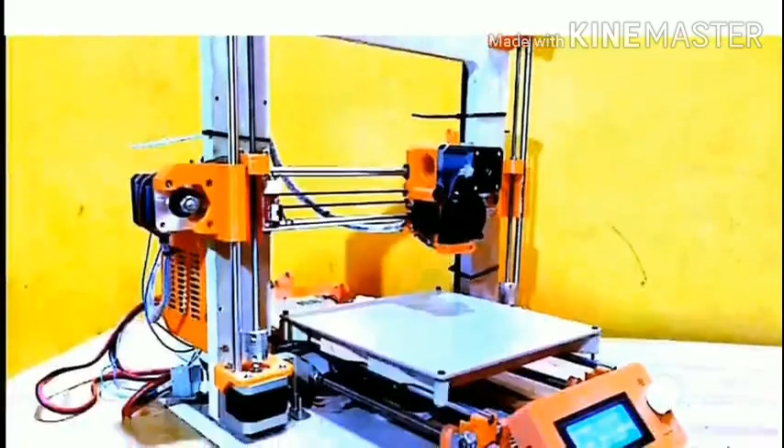We are going to use FDM technique in our 3D printer. FDM stands for Fused Deposition Modeling. Fused deposition modeling is an additive manufacturing process that belongs to the material extrusion family. In FDM, an object is built by selectively depositing melted material in a predetermined path layer by layer. The materials used are thermoplastic polymers.

Fused deposition modeling is one of the most widely used technologies in rapid prototyping. On the principle of layered manufacturing, the melted polymer filament is extruded and formed. Now, FDM technique.

FDM 3D printing is a technology that works both horizontally and vertically, where an extrusion nozzle moves over a build platform. The process involves the use of thermoplastic material that reaches melting point and is then forced out to create a 3D object layer by layer.

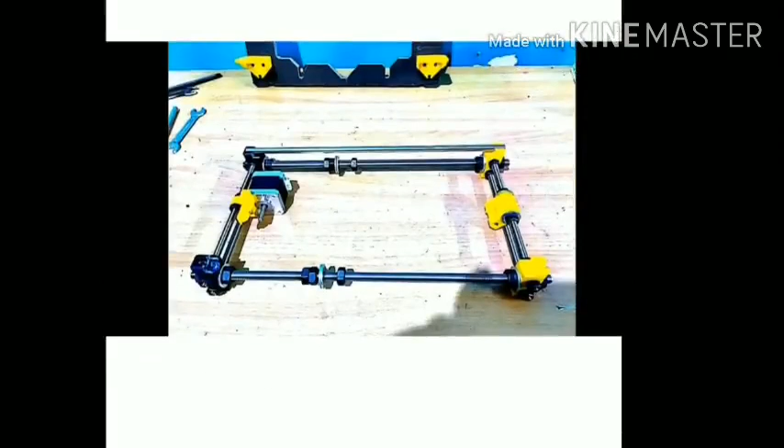This is the assembly part of our 3D printer. This is the base for the Y-axis assembly, which we made through a CNC machine. Here this is the Y-axis assembly. The motor is mounted on the rods, which in turn move the bed as per the requirements. The length of the rod is 370 mm. Here the Y-axis assembly is mounted on the base frame.

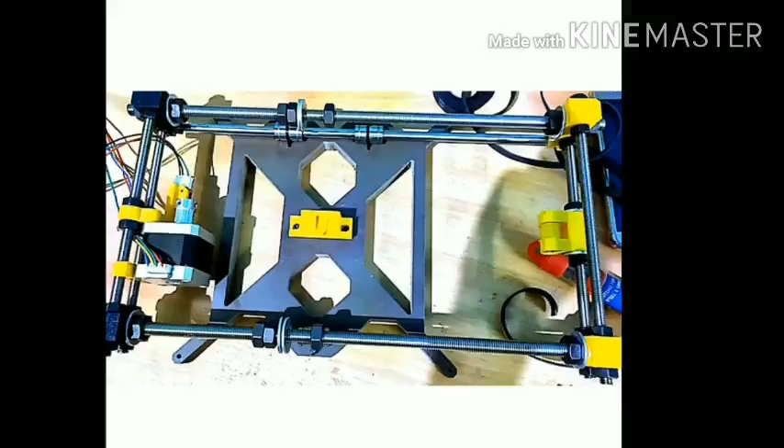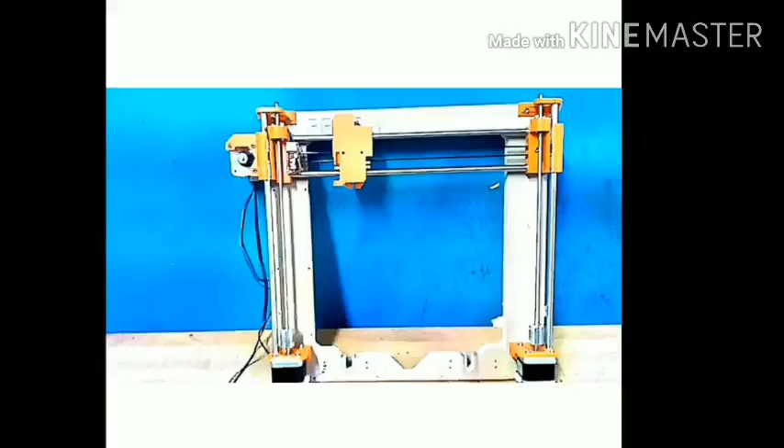The X-axis assembly, on which the extruder and the nozzle are mounted, and their movement is controlled using a stepper motor. The Z-axis assembly, in which there are two stepper motors mounted on each side, which help to move the extruder assembly up and down in the Z-axis direction.

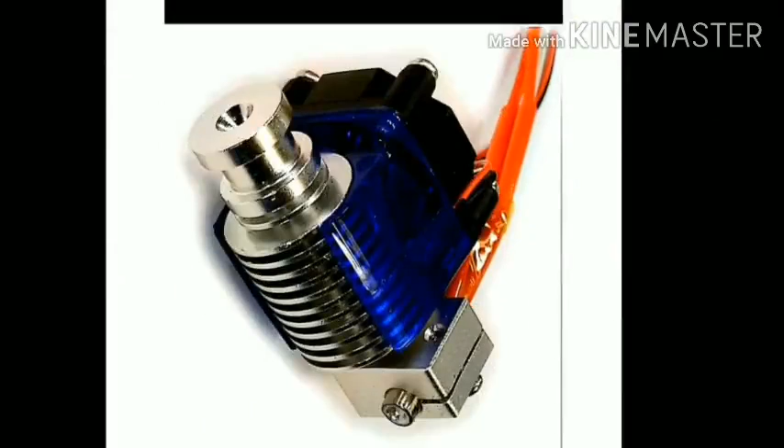This is the extruder unit. Extrusion is a process used to create objects of a fixed cross-sectional profile. A material is pushed through a die of a desired cross-section. We are using the method of direct extrusion, in which the extruder is placed directly above the nozzle. Now let's look at the electronic components that we have used.

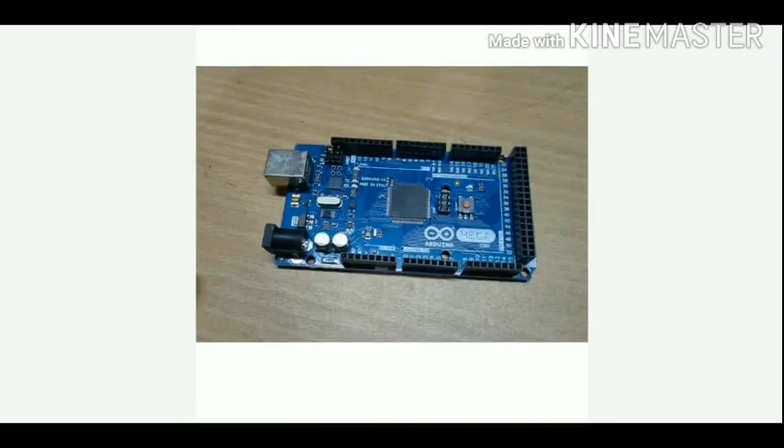This is the Arduino Mega 2560 board. It is the microcontroller board that we will be using. This is the RAMPS 1.4 daughter board that is mounted on our Arduino Mega. RAMPS is RepRap Arduino Mega Pololu Shield. It's the brain of 3D printers. It serves as an interface between the Arduino Mega and the devices on the 3D printer.

On this we are also going to mount the stepper motor drivers and the end stops. On this you can put up to 6 end stops, but we are only going to use 3. It also has heat bed controls and extruder control pins. RAMPS organizes and compiles the information coming from the Mega so it is properly directed to the correct channels.

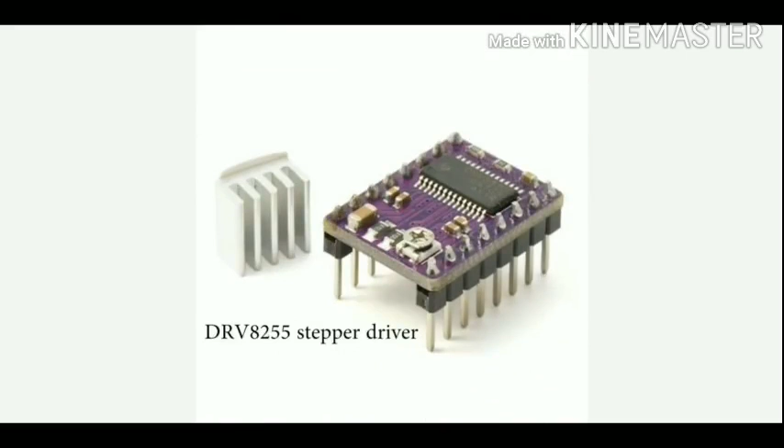Next we have the 12 volt DC stepper motor that we have used. We are using these stepper motors for controlling the X-axis, Y-axis and Z-axis movements. This is the DRV8825 stepper motor driver. The function of this is that it controls how the stepper motor operates. It works by sending the current through various phases and pulses to the stepper motor.

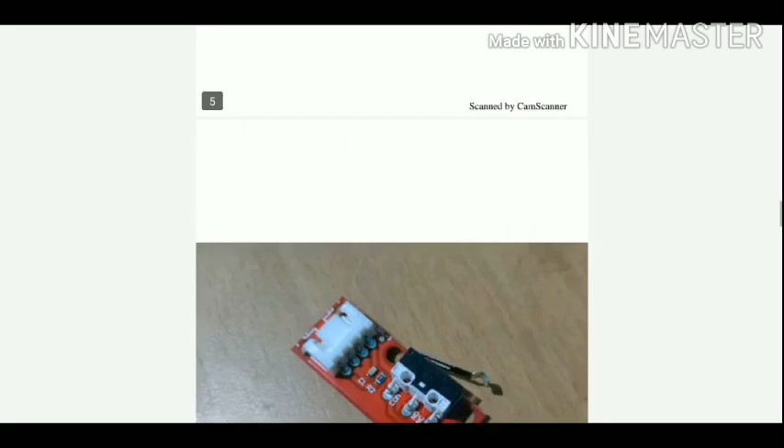Next we have this end stop. The end stop is for the reference of the axis. So we are going to use 3 end stops. We are going to use this to know the position of the nozzle. When the printer is started, the software doesn't know the starting position of the nozzle. So with the end stops, we are going to know the starting position of the nozzle. This process is also called homing.

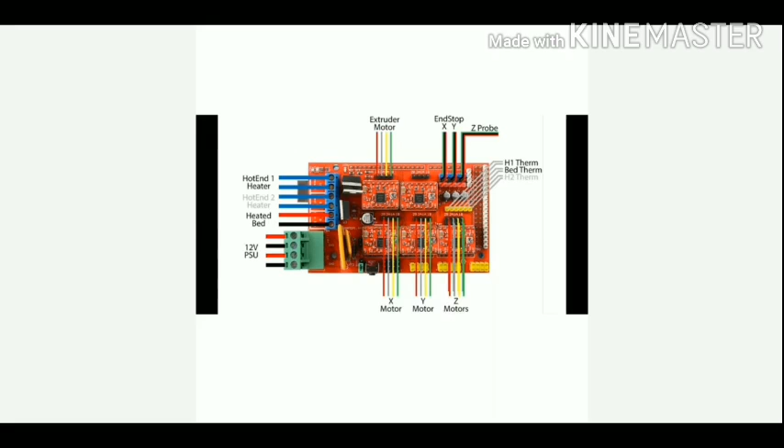This is how the circuits and pins and everything are connected to the RAMPS board. You can see where the extruder motor goes, where the end stops for X, Y and Z axis go. You can also see the X, Y and Z motors where they are fitted. This is the power supply that we have used. It is a 30 amps power supply unit.

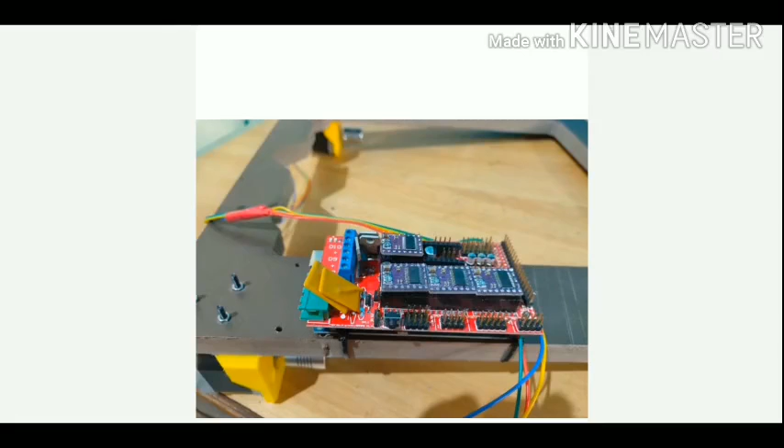Here you can see that we have mounted the Arduino board on the frame of the Y-axis, and on that we have put the RAMPS board on the Arduino Mega board. And here you can see that we have mounted the power supply on the Z-axis frame.

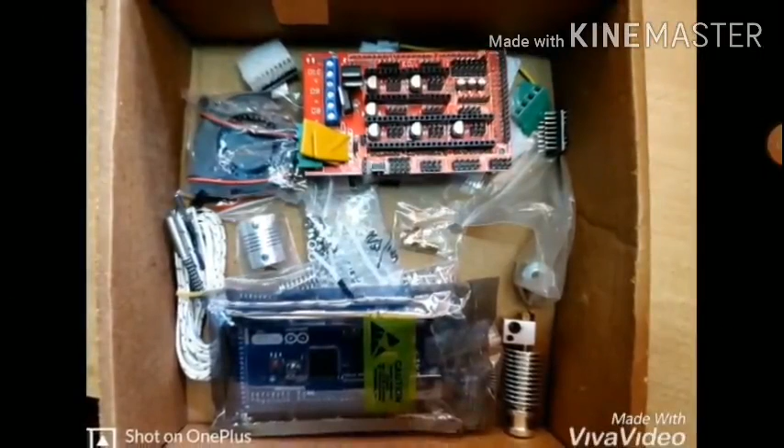So to carry out the construction of the 3D printer, we have purchased some parts. These are electronic parts which include thermistors, sensors and some electronic boards. Then we have the stepper motors, the bearings, the wires and the steel rods, Arduino board and the power supply unit.

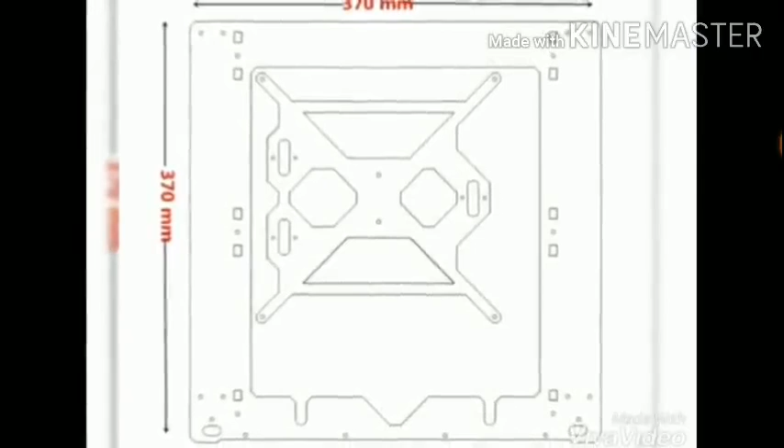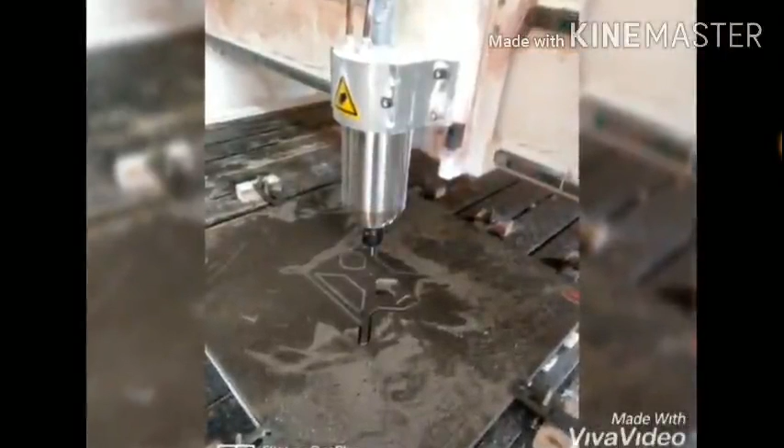So the most important part of the 3D printer is the inner frame and the outer frame. The length is 370 mm and the breadth is 370 mm, and it has a thickness of about 12 mm. The machining is carried out using a CNC machine, and the material used for machining is wood.

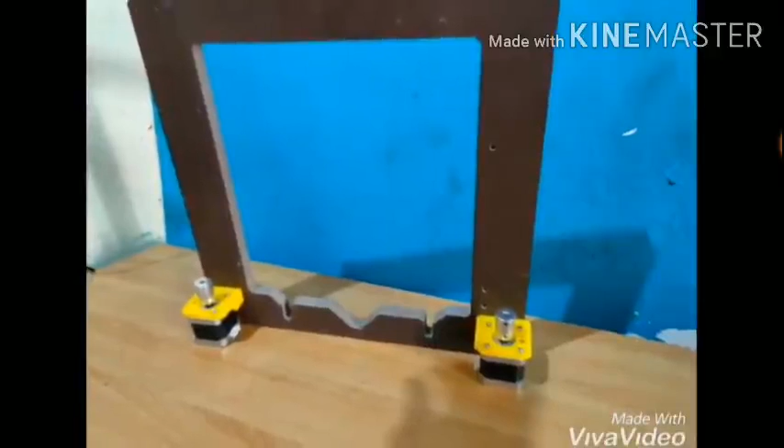So the base acts as a frame, or it acts as a hot bed assembly, and the outer frame or the vertical frame will be held vertical, so it will help in the upward and downward movement of the extruder assembly. Then we have also designed some other 3D printed parts using another 3D printer.

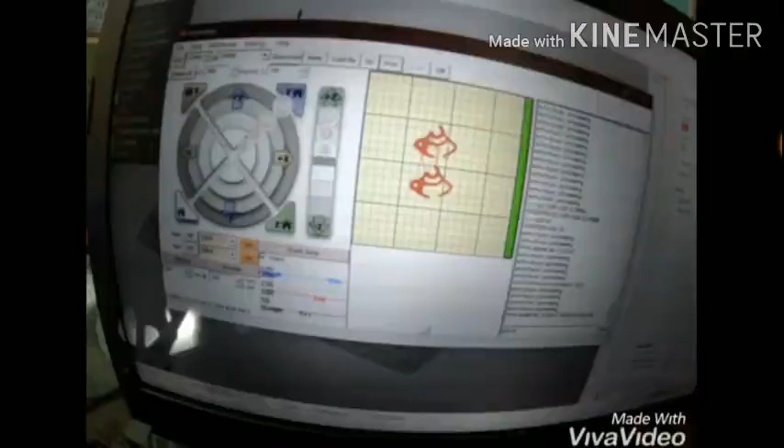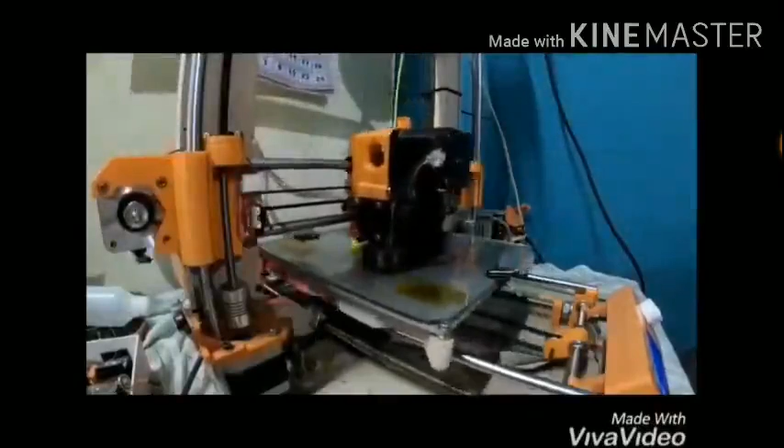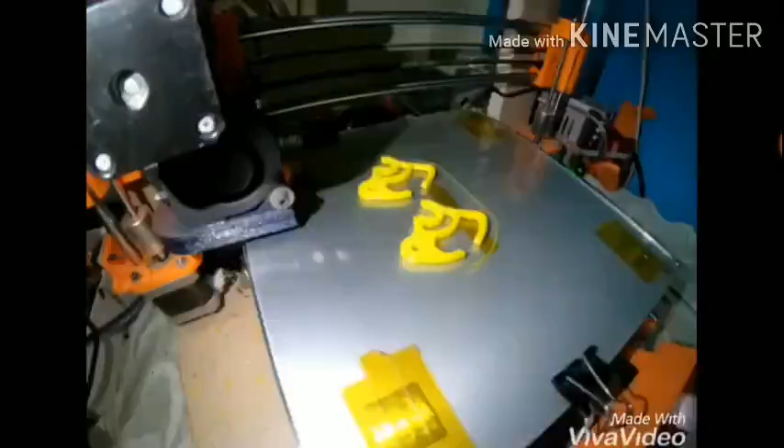So the three basic steps that we need are designing, then slicing and then G-coding. We have first designed the part, then we have sliced it, and then we have obtained the G-code. This G-code will be recognized by the 3D printer, and it will get the necessary output. These steps are further explained in detail, like how the process has been carried out. So this was the part which has been designed.

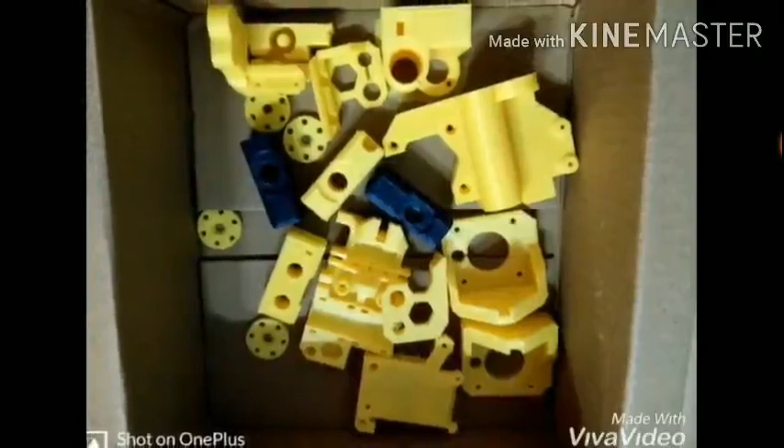So these are some of the parts which we had designed, which will help in the movement of the stepper motors and also help in the building of the X, Y and Z assembly.

Now coming towards the software that we are going to use in this process of 3D modeling using FDM techniques, we are going to use Fusion 360 software, that is used for designing. Then next we have slicer software, which will slice the object that we have designed and want to print, and it will generate a G-code.

And another software called Pronterface, wherein we are going to load the file and give the signals of the G-code to the printer. So now I have directly taken an STL format file which has been done through Fusion 360, and the view of it looks something like this.

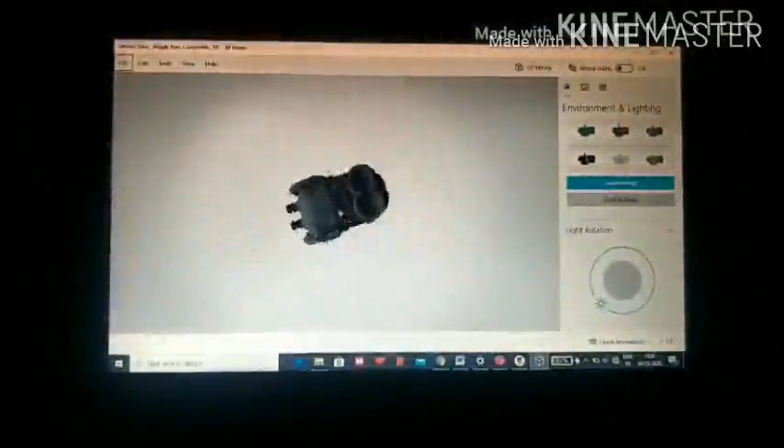So it's an object which is created, it is in STL format. As you can see right here, it is in STL format. It is viewed through a 3D viewer at the moment. Further on, after we generate this STL format file, we go and open a slicer.

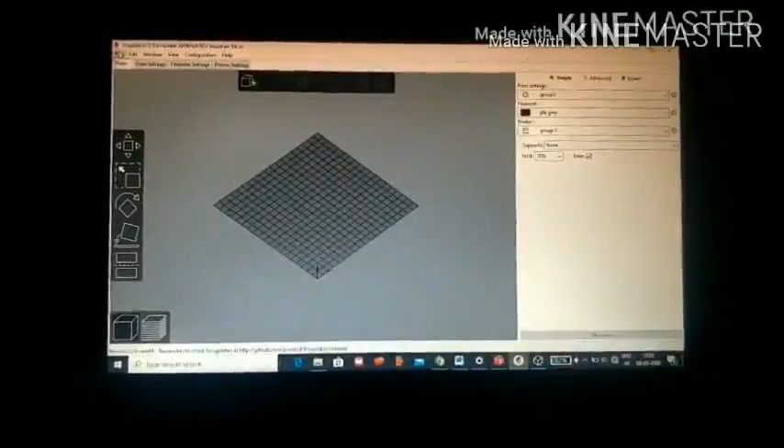What does a slicer do? A slicer slices the object and it helps us in generating the G-code. So now I will slice the object that I have designed, and I will import an STL format object. It's on my desktop.

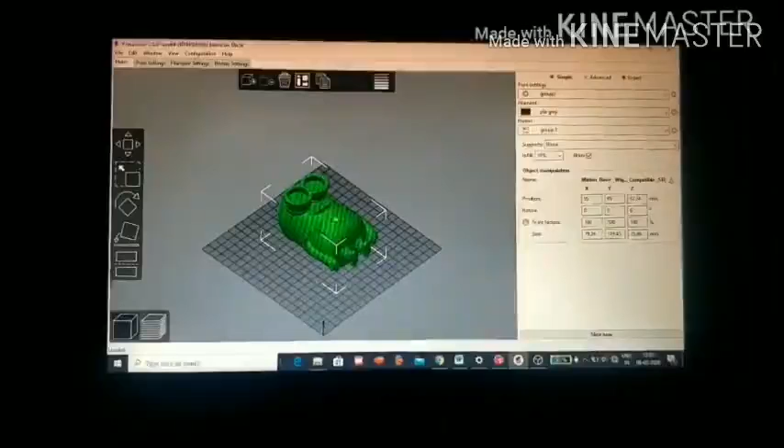As you guys can see, it's loading, and here we have the object which was in STL format. At the moment it is still in STL format, my dear friends. Let's decrease it a bit. And now it's time to slice the object. If you are not comfortable with the dimensions, you can change them however you like.

You can put whatever material you're using, the class of the material, the amount of temperature required. In here we see the extruder temperature; for the moment, as a display, I'm using a PLA gray, and for it I have to use an extruder temperature of 190 degrees Celsius and a bed temperature of 60 degrees Celsius.

For better print quality, we can change the size of the layer which is going to get printed. We can use 0.1 or 0.2 or 0.3. The higher the number, the more the quality will be distorted. So in other words, the lesser the number, the greater the quality.

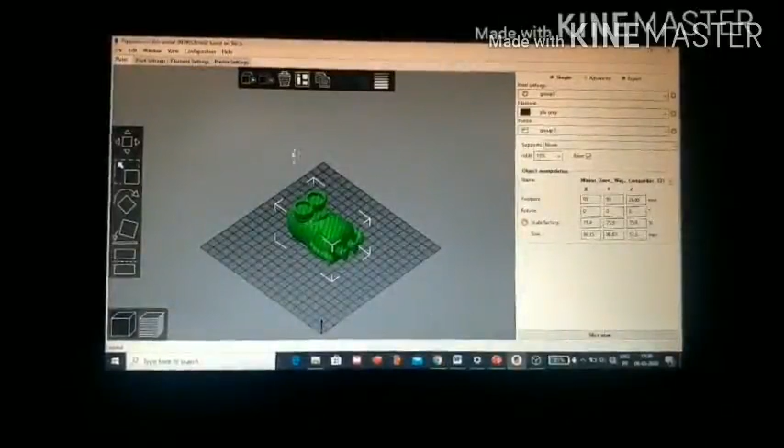Now let's slice this object. After you place the object on the tray, this is the display tray, you just go and click on this slice button, wherein it will slice the object into different layers. Now the slicing is going. Now the slicing has taken place.

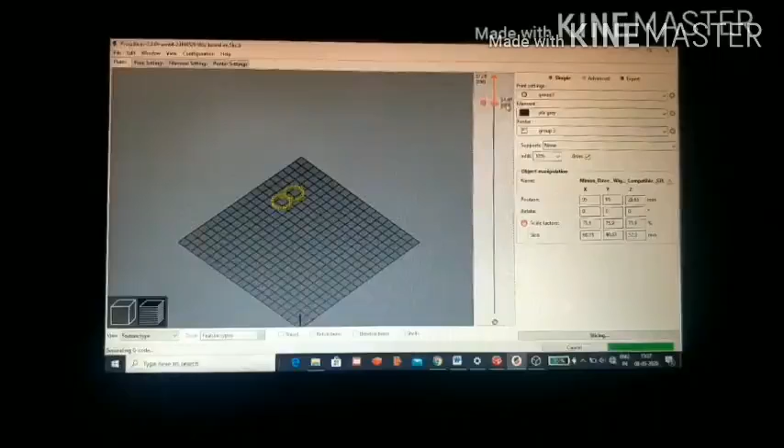So my dear friends, here as you can see this line, through this we can come to know how the object is going to be prepared from the top face to the end. If you want to see it from the bottom, you can see it from the bottom itself. As it is still slicing, you can see it over here. After this slicing, we can generate the G-code.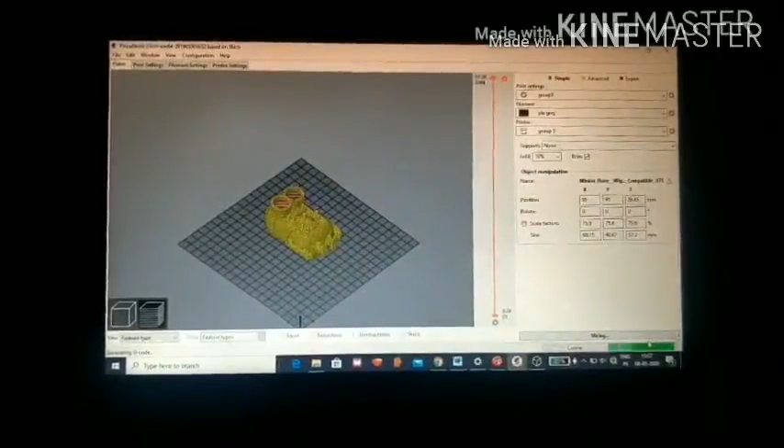Now as we can see, the slicing is completed, and now we can see the total cost of the material, the filament used, and the total time it will take to print this particular object. So at the moment, for a normal mode, it shows almost 3 hours to print this particular object with these dimensions. So now after this we go and export the G-code.

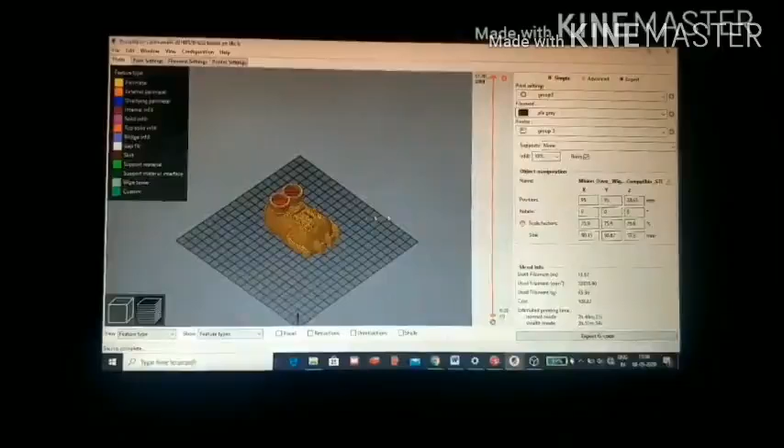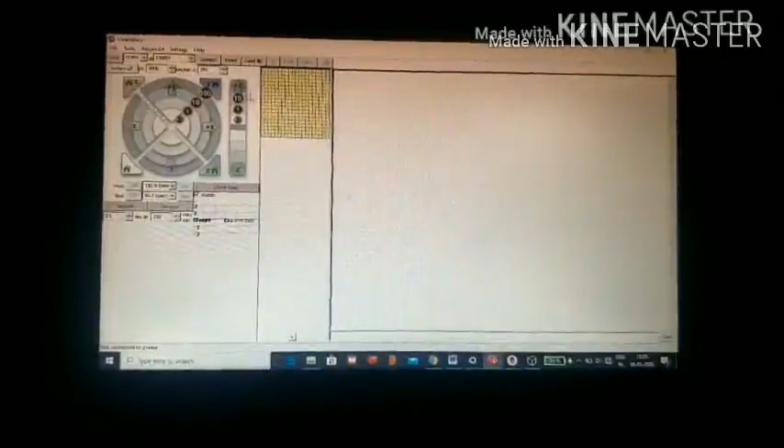Now when the G-code is exported, we save this G-code to the desktop. We just name it project 1, okay, and we save this G-code. Now we close or minimize the software, and we open the third and final step, that is the Pronterface software. In this Pronterface software, we have to first connect our 3D printer to this PC, and then load the file, whatever file we are going to be using.

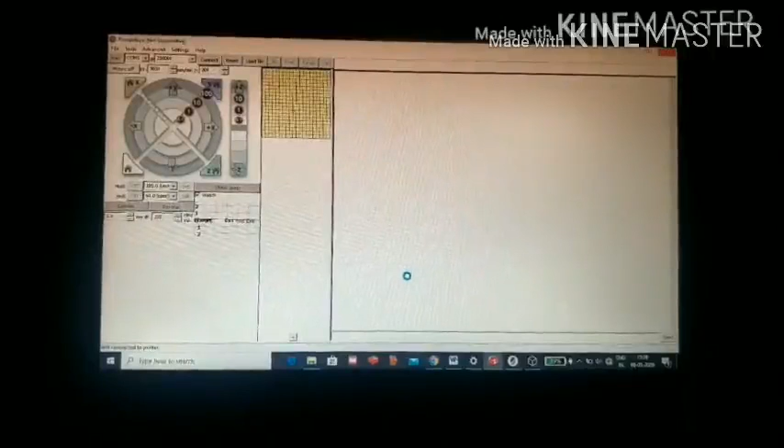So now, as our file was on the desktop, it was project 1 G-code. Now this file, I open it in the software called Pronterface. Now as you can see this black mark over here, it's the file that is to be printed, and these are the codes with the dimensions which are required.

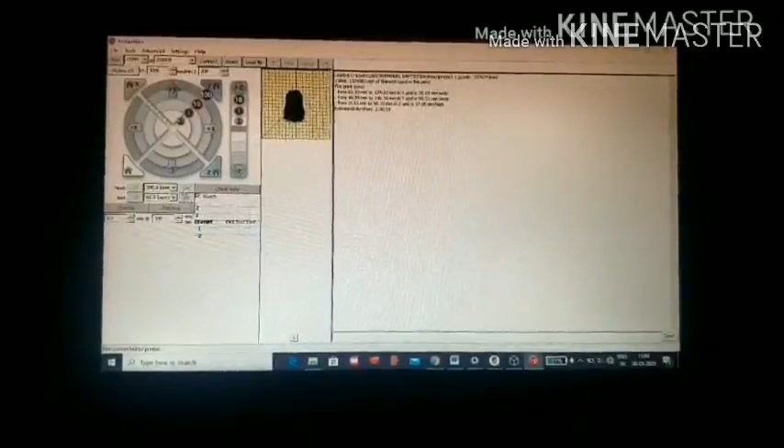And while doing this, my dear friends, we have to see that the temperature of the bed and the extruder remains constant, as we have already set it over here. And after doing this, you can just directly click on print, and the object will start printing.